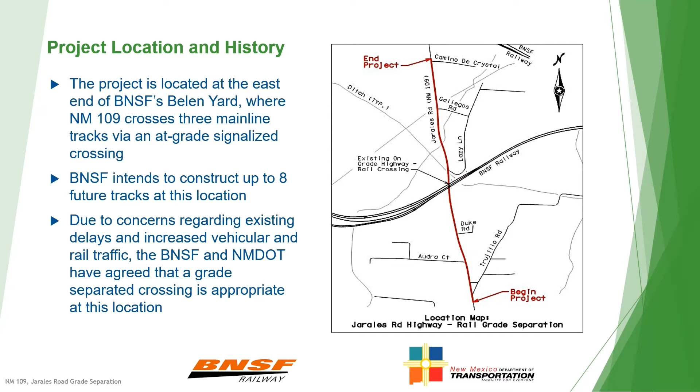Due to concerns regarding existing delays and increased vehicular and rail traffic, the BNSF and the NMDOT have agreed that a grade-separated crossing is appropriate at this location.

The project is being developed using the NMDOT's location study procedures. Phase A is the initial evaluation of alternatives, where we identify existing conditions, project purpose and need, and possible design alternatives to address needs, and obtain public input. Phase B is the detailed evaluation of alternatives that appear to have merit, and selection of a preferred alternative.

The BNSF, in partnership with the NMDOT, prepared a combined Phase A-B report for this project, and we are presenting the findings with this presentation. The next steps are Phase C, the environmental documentation, and Phase D, the preliminary design of the preferred alternative.

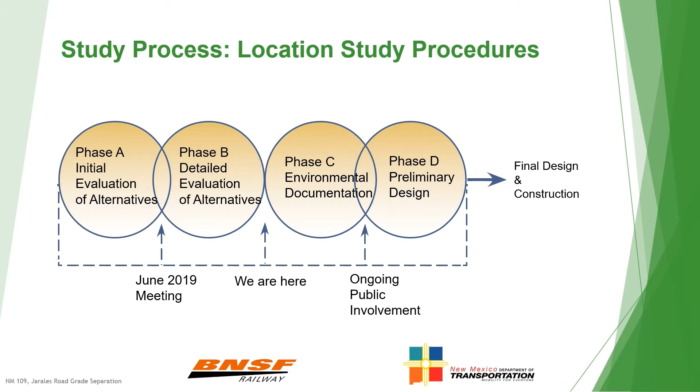The NMDOT will manage the project going forward and has selected an engineering consultant, Wilson & Company, to complete the necessary design work. An initial public meeting was held in June 2019 at Gil Sanchez Elementary School in Jarales with over 100 participants and many good questions and comments.

Some of the topics included a suggestion for a new alternative that extends north of Alternative D, widespread support for the project, concerns about trains blocking the existing roadway, concerns about changes in the community and other environmental issues, right-of-way and relocation questions, questions about access to property, and preference or opposition for certain alternatives.

The study process includes an analysis of existing and future conditions. New Mexico 109 is a 2-lane north-south major collector road that provides connectivity between the city of Belen and Jarales. The existing road has 2 11-foot travel lanes with 1 to 2-foot shoulders.

Current traffic is estimated to be 1,759 vehicles per day with 6% heavy trucks. The posted speed limit is 40 miles per hour.

Existing usage includes police, fire, and emergency services, truck traffic from nearby industry, bicycles and pedestrians, commuters, and local traffic from numerous properties and side roads, including agricultural vehicles.

Although daily traffic varies, the data show an average of 90 trains per day, some of which are nearly 2 miles long. Vehicles currently experience delay as trains cross the highway.

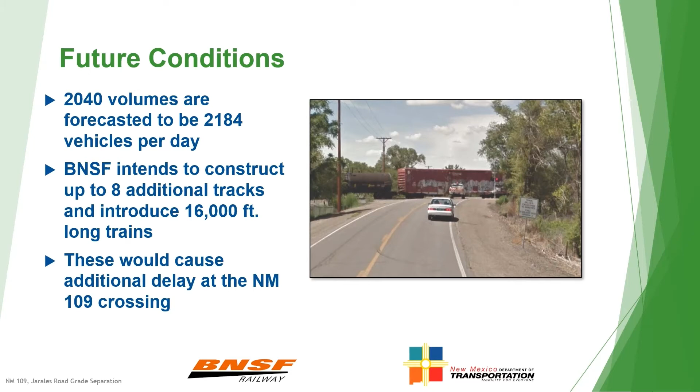For these reasons, the need for this project is at an all-time high and is supported by the community.

Part of the NMDOT's project development process is to define purpose and need. The purpose of this project is to provide a safe, uninterrupted route for pedestrian, bicycle, and vehicular traffic across New Mexico 109 while accommodating current and future rail operations.

The specific needs are based on the following. Physical deficiencies include shoulders that are not adequate for pedestrians and bicycles. Safety is an inherent concern for road-rail at-grade crossings. Though the past crash rate is moderate, 5 vehicle-train accidents have occurred in the past 10 years.

Travel demand and congestion will be impacted with growth in rail operations and the addition of tracks. Delays on New Mexico 109 can significantly impede response times for emergency services. Access relates to driveway and cross-street spacing, which currently exceeds NMDOT standards and can affect safety and traffic operations. System connectivity between areas to the north and south is restricted by current conditions, and future expansion plans would increase this problem.

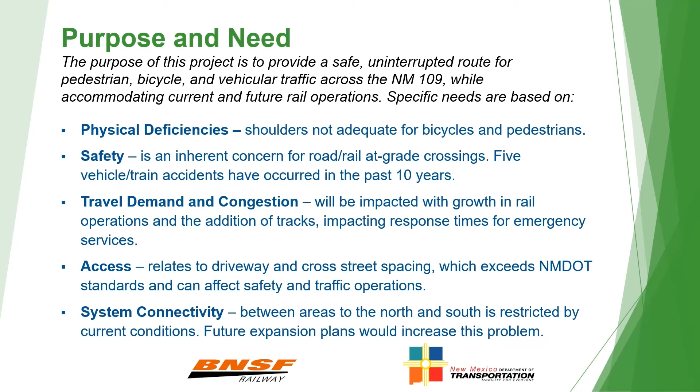To address these needs, 6 overpass alternatives were developed during Phase A of the study, in addition to the no-build option. These include A, 70 feet west of existing New Mexico 109, B, in line with the existing roadway,

C, 70 feet east of the current alignment, D, 750 feet to the west, E, 500 feet east and following a portion of Trujillo Road, F is 600 feet west of New Mexico 109, on an extended north alignment that was added as a result of input at the previous public meeting, and G, the no-build alternative.

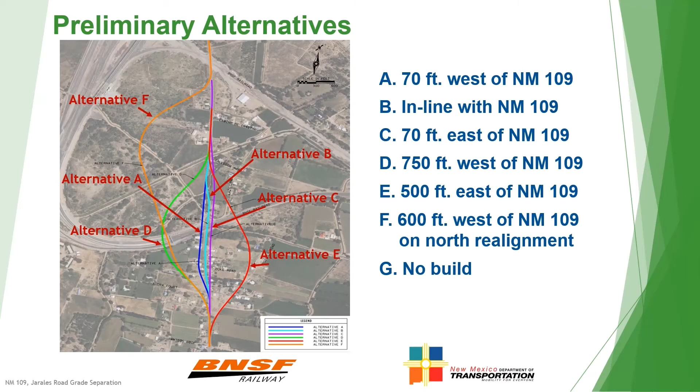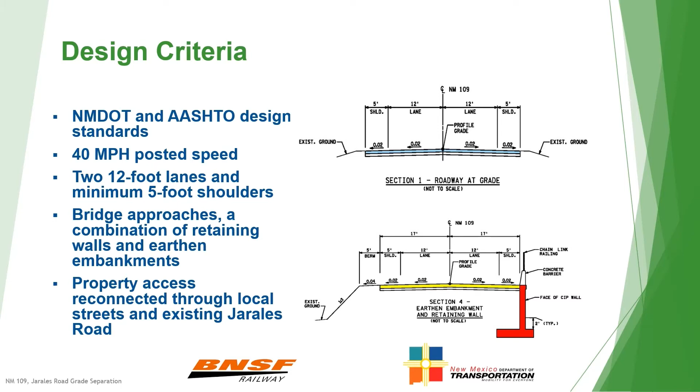Each of the alternatives was developed according to NMDOT and American Association of State Highway and Transportation Officials (AASHTO) standards. The posted speed would be 40 miles per hour, as currently exists, and the roadway and bridge would have two 12-foot lanes and two shoulders, a minimum of 5 feet wide, to accommodate bikes, pedestrians, and farm equipment. The bridge approaches would have a combination of retaining walls and/or earthen embankments. For a sense of scale, the bridge deck itself would be approximately 38 feet above the existing road. Access to property would be maintained through reconnected local streets and existing Jarales Road.

In Phase A, an initial screening level evaluation was completed to eliminate alternatives that were not feasible or inferior to other alternatives. The objective was to review the major differences between alternatives on a qualitative level. Therefore, detailed evaluations were not performed during this phase. The evaluation criteria are shown on this slide.

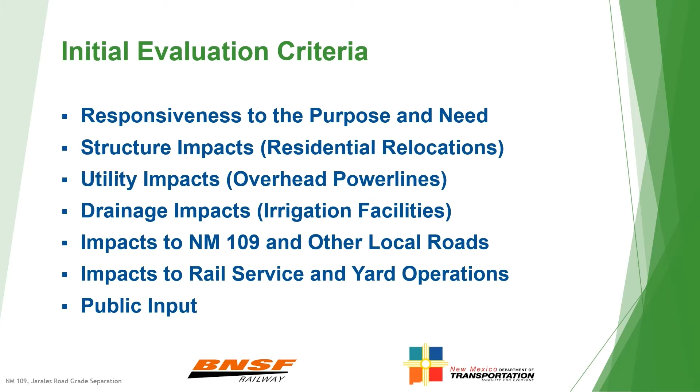All of the alternatives except the no-build option address the purpose and need. Structure impacts address residential relocations. Utility impacts primarily relate to overhead power lines in the project area. Drainage impacts concern the need to construct, replace, or extend irrigation facilities. Impacts to local roads consider whether access would be restricted during or after construction. Impacts to rail service consider effects on rail operations during and after construction. Public input reflects the comments for or against specific alternatives. The evaluation criteria were applied to each alternative, and based on these ratings, alternatives were eliminated or advanced.

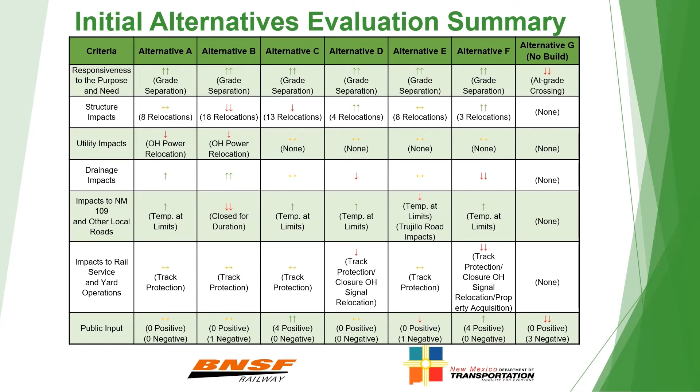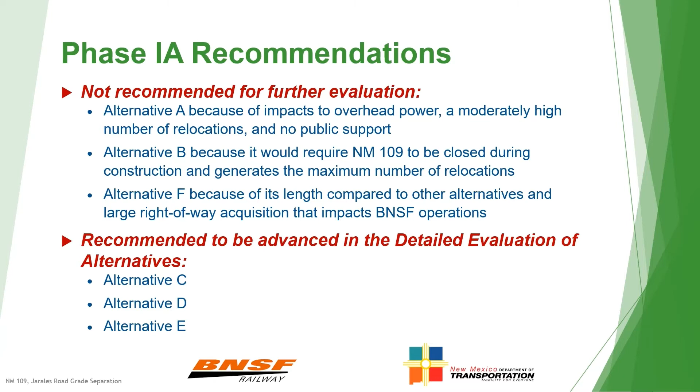This table summarizes the initial alternatives evaluation. Three alternatives were not recommended for further evaluation. These include Alternative A, because of impacts to overhead power, a moderately high number of relocations, and no public support; Alternative B, because it would require New Mexico 109 to be closed during construction and requires the maximum number of relocations; and Alternative F, because of its considerable length compared to the other alternatives and large right-of-way acquisition that impacts future BNSF operations. The alternatives recommended to be advanced in the detailed evaluation include Alternatives C, D, and E.

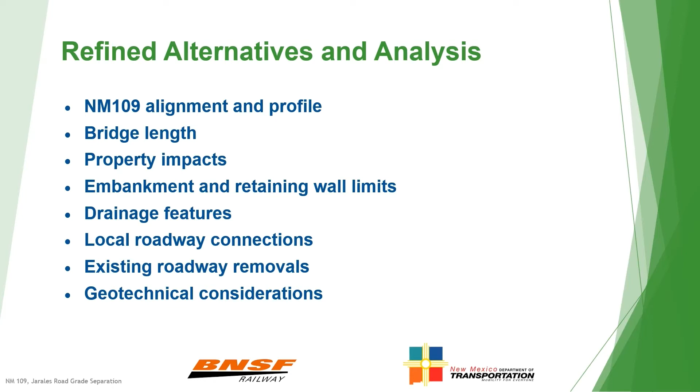In the refined analysis, conceptual roadway and structure plans were developed for each alternative recommended for further evaluation. The plans included the New Mexico 109 alignment and profile, bridge length, property impacts, embankment and retaining wall limits, drainage features, local road connections, existing roadway removals, and geotechnical considerations. The alternatives are shown on the following slides.

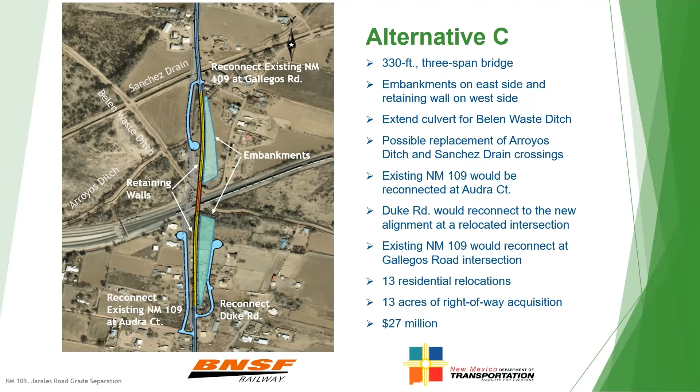Alternative C would require a 330-foot three-span bridge with embankments on the east side and retaining walls on the west side. The Belen Waste Ditch crossing would be extended, and the Arroyos Ditch and Sanchez Drain crossings may need to be extended or replaced. Existing New Mexico 109 would be reconnected at Audra Court, and Duke Road would reconnect to the new alignment at a relocated intersection. North of the tracks, Alternative C would reconnect to existing New Mexico 109 at Gallegos Road. This alternative would require a total of 13 relocations and 13 acres of right-of-way. The estimated cost, including right-of-way and relocations, is $27 million.

Alternative D would require a 584-foot long, 6-span bridge on a curved alignment. It would be constructed on embankments in open areas and retaining walls in developed areas. New crossing structures for the Arroyos Ditch and Belen Waste Ditch, and an extension of the Sanchez Drain crossing, would be required. West of the new alignment, access roads would be constructed for adjacent properties. Existing New Mexico 109 would be reconnected at Trujillo Road. North of the tracks, existing New Mexico 109 and Gallegos Road would reconnect to the new alignment. Alternative D requires 4 relocations and 30 acres of right-of-way. The estimated cost is $26.6 million.

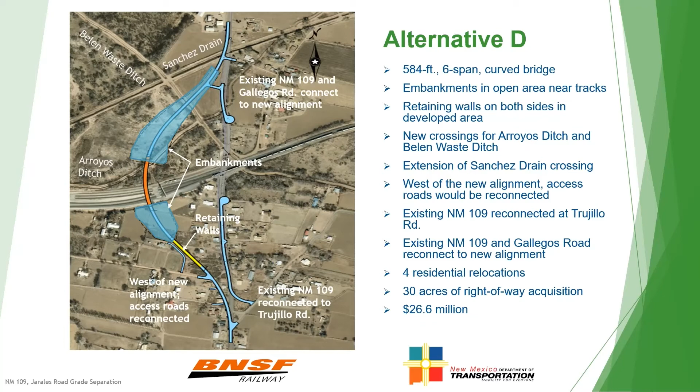Alternative E requires a 284-foot long, 3-span bridge. It would be constructed with embankments in vacant land and retaining walls near the tracks to avoid relocations. New or extended crossing structures would be needed for the Arroyos Ditch, Sanchez Drain, and Belen Waste Ditch. Trujillo Road would be widened and slightly realigned, and existing New Mexico 109 would be reconnected to Trujillo Road. The northern section of Trujillo Road would be connected to the new Alternative E alignment via a new road. Existing New Mexico 109 and Gallegos Road would reconnect to the new alignment on the north side. This alternative requires 8 residential relocations and 20 acres of right-of-way. The estimated cost is $30.2 million.

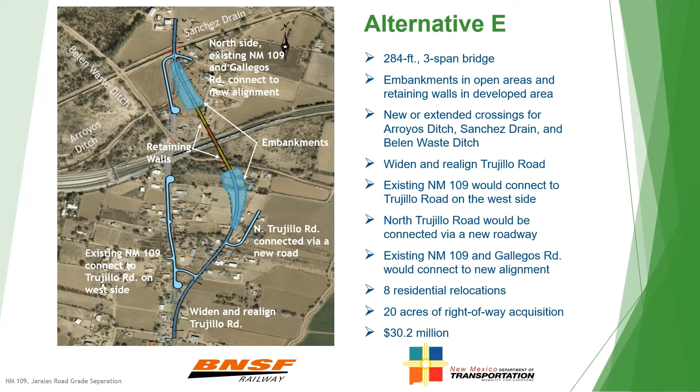Each alternative was subject to a refined evaluation of engineering and environmental factors, as shown here. The evaluation was similar to the initial alternatives in terms of purpose and need, structure, utility, and drainage impacts, impacts to local roads and rail service, and public input.

In the refined analysis, the metric for structure, inspection, and maintenance is bridge length. Longer bridges would require greater effort to inspect and maintain and are rated accordingly.

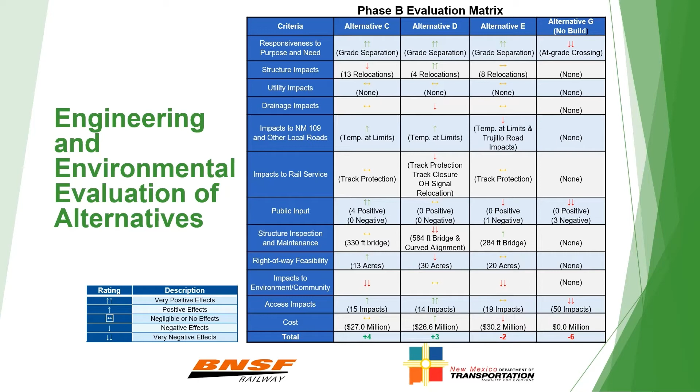Right-of-way feasibility was estimated by summing the area of impacted property. Environmental and community impacts primarily include relocations, changes in access and property use, noise, visual impacts, and cultural resources. Access impacts address the number of intersections that would not meet NMDOT access management requirements. Costs are based on standard NMDOT construction pay items and also include estimates for relocations and property acquisition.

In terms of structure maintenance and inspection, alternative D's bridge length and complexity is a critical disadvantage when compared to alternative C and E. The required right-of-way to construct alternative C is less than alternatives D and E. Regarding drainage impacts, alternative C requires fewer improvements to irrigation facilities than either alternative D or E.

In terms of impacts to local roads, alternatives C and D both can be largely constructed offline. Alternative E would require reconstruction of Trujillo Road with associated impacts.

Alternative D impacts rail service. It requires relocating an existing signal bridge within the rail yard, creating a problem for maintenance of rail operations. The pier locations for alternatives C and E allow construction outside the existing tracks.

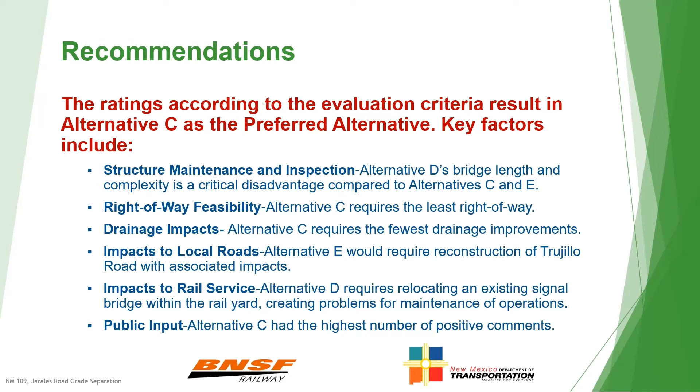Public input included strong support for a new grade-separated crossing and included a mix of preferences between the various alternatives. Alternative C stood out as having the highest number of positive comments.

These are the next steps. The NMDOT has accepted the findings of the Phase AB study and is finalizing the report. We would like to hear your input by September 1st, 2020.

The next steps will include preparing environmental investigations, including natural and cultural resource surveys, studies of community concerns such as visual impacts, noise, property access, and relocations, and other studies as needed.

We will then prepare an environmental document under the National Environmental Policy Act, or NEPA, which may be a categorical exclusion or an environmental assessment.

The next steps also include preparing preliminary design documents, which will refine the engineering to a 30% level. This more specific information will allow discussions with property owners about right-of-way needs and relocations.

Final design and construction will follow and are anticipated in late 2021.